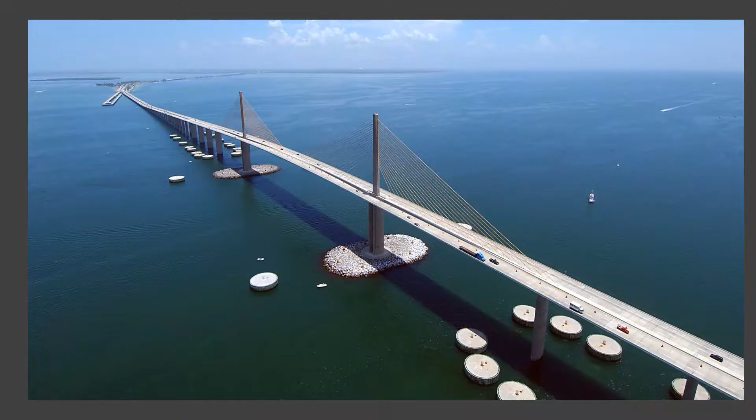Welcome to the District Structures Maintenance Office Learning Lab. Before we start, here's a note from our fearless leader, District Structures Maintenance Engineer, Jim Jacobson.

Good morning. My name is Jim Jacobson and I want to welcome you to our District Structures Maintenance Office Learning Lab. You might have heard our names as the Bridge Office, District Bridge, or Structures Maintenance. We answer to all of those names. I joined the department in 1999, and in 2010 I have the honor of serving as the District Structures Maintenance Engineer. We have 14 people in our office covering 17 counties and 2 districts.

The reason our office was formed was back in the 1960s, the nation and Florida did not have a standardized bridge inspection program. Well, this led to, in 1967, the Silver Bridge over the Ohio River collapse, killing 46 people. The next year, in 1968, closer to home, just up here in Pinellas County, the US 19 bridge over the Anclote River collapsed, killing 1 person and injuring 5. So that really got Florida and the nation geared up for a standardized bridge inspection program. So by the early 1970s, this office was formed out of D1, and ultimately when it split, it serves now both districts, D1 and D7.

As you may have guessed, our core mission is to inspect, maintain, and operate the state's bridges. We also inspect locally owned bridges and give the reports to the locals through a federally funded program. Anything over 20 feet is a bridge, and we also do a lot of other ancillary structures, as you'll learn from our members here. So I really am proud to share our team here who will showcase what they do. It's a group of talented people dedicated to this core mission, and I want to thank you for participating today.

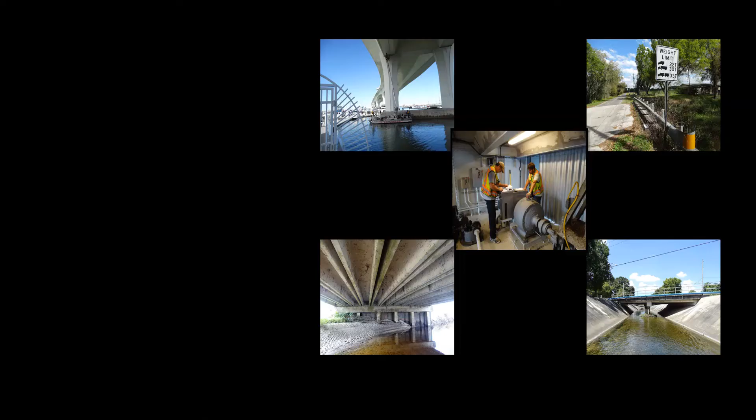The Bridge Office has many responsibilities, which include, but are not limited to, bridge management, bridge repair and rehabilitation, load ratings, and emergency response. Next, let me introduce the DSMO admin staff, Linda Green and Patricia Armbrust.

Hello, my name is Patricia Armbrust. I am the Administrative Secretary for the District Structures Maintenance Office. My function here is to assist with the administrative duties, such as processing the monthly invoices and the motor logs and conducting safety inspections. I also am responsible for the MMS data input and the EDMS structures files. And once a year, I get to go on a scavenger hunt for the property inventory. And I'm also here to assist you. So if you're not sure what you need, I might be able to help you with that.

Hello, good morning. My name is Linda Green. I am the Administrative Assistant for the District Structures Maintenance Office, more commonly known as Bridge. My function here at Bridge is to support our cost center manager, Mr. Jim Jacobson, and the supervisors. I have several duties and responsibilities. I am responsible for our operating budget, tracking, preparing spending plans to maximize funds, processing purchase requests, and all purchases for the cost center. I also prepare travel, surplus items, manage requisitions, hire packages, and I am a safety coordinator, just to name a few. We are your District Structures Maintenance Office.

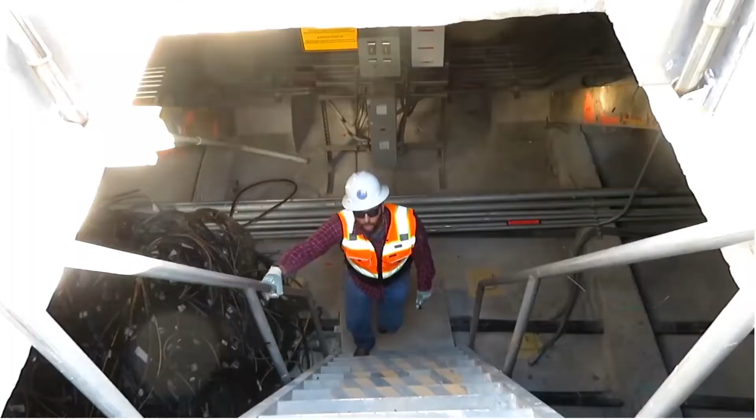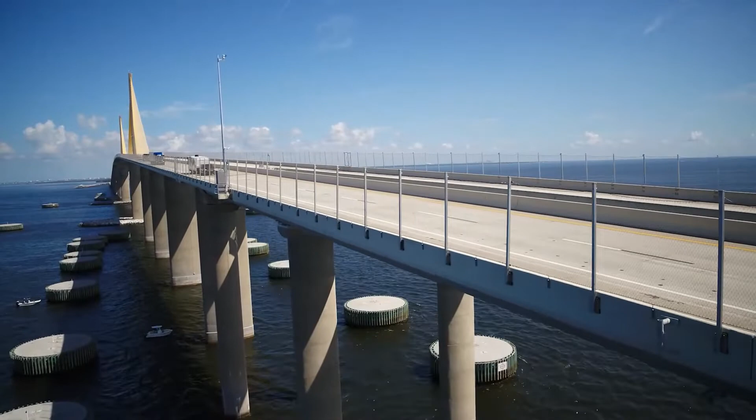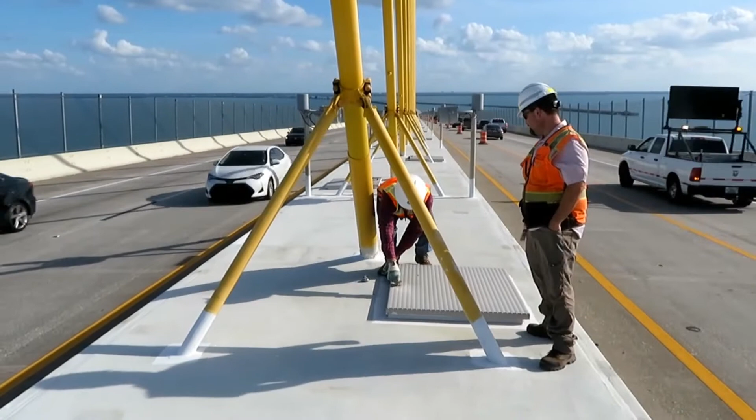Hi, I'm Dan Budens. I work at the District Structures Maintenance Office. I'm a Senior Bridge Engineer Level 2. My responsibility here is to preserve Florida's flagship bridge, the Bob Graham Sunshine Skyway Bridge. It was constructed in the 80s and opened to traffic on April 30th, 1987, at a cost of $244 million to construct. The bridge is nearing its 35-year anniversary. It's my job to ensure that the bridge can continue to provide service life for many years to come. In fact, our target is to get over 100 years of service life out of the bridge.

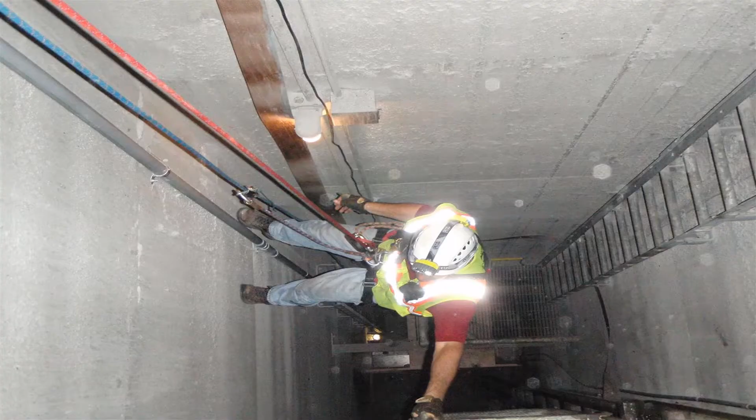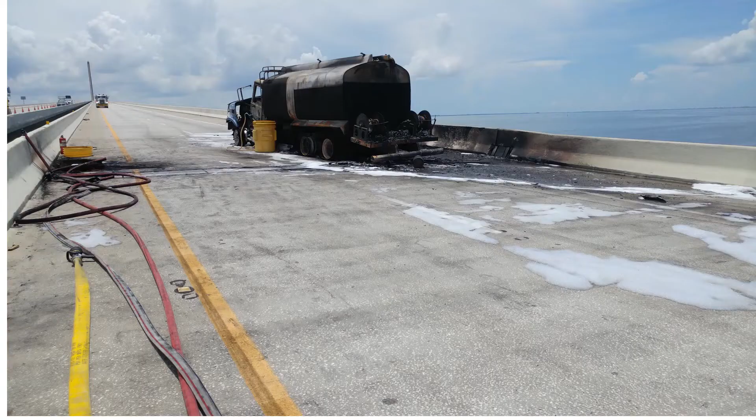To accomplish that goal, we need to proactively maintain the bridge. To do so, we carry out several in-depth routine bridge inspections with extremely detailed bridge inspection reports. We have a full-time asset maintenance contractor working for the department to keep on top of routine and unexpected maintenance needs. Additionally, we generate work orders and repair work items for our asset maintenance contractor to complete based on the inspection reports.

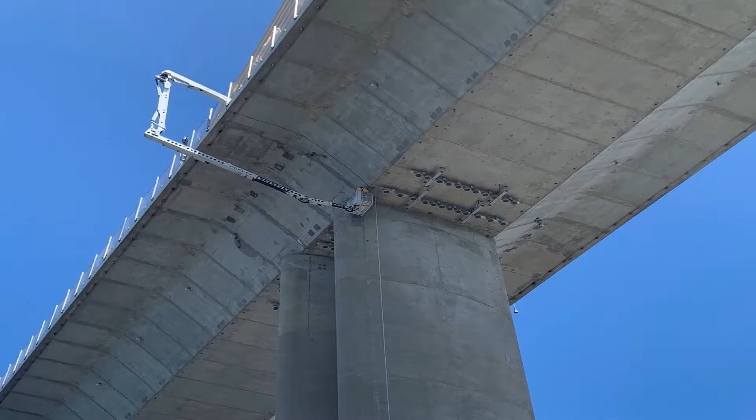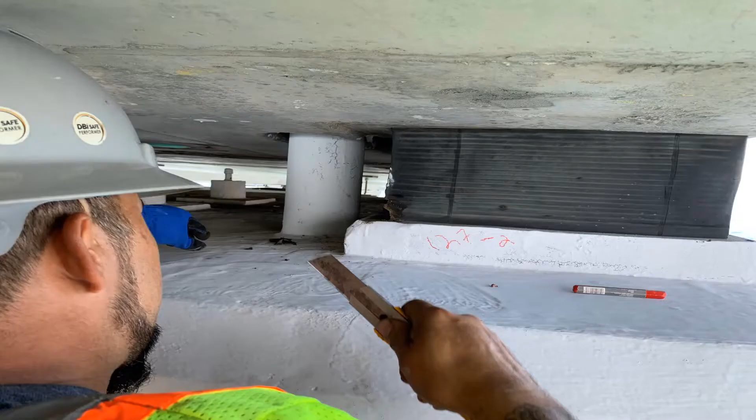For these repair items, based on the severity of the repair need, different priority levels, 1, 2, or 3, are established, and those come with different time frames for completion of the work. For example, a high priority work item would be classified a level 1 priority. It would come with a 60-day timer for the work to be completed. A lower level priority work order would be considered a level 3, and it has 360 days for the contractor

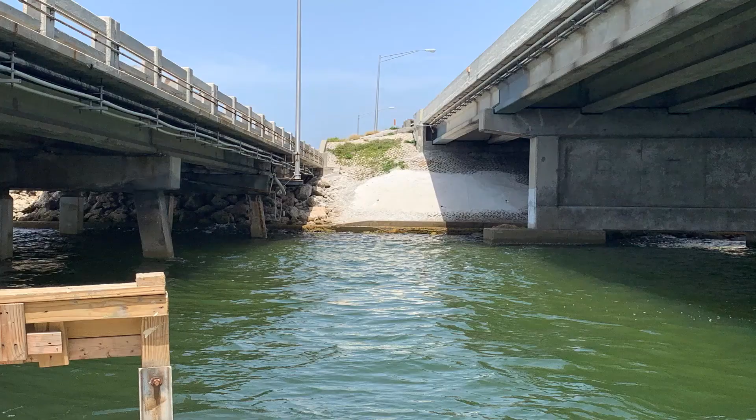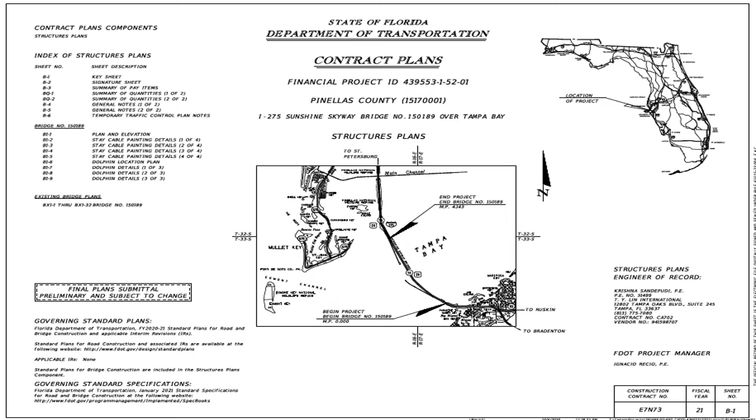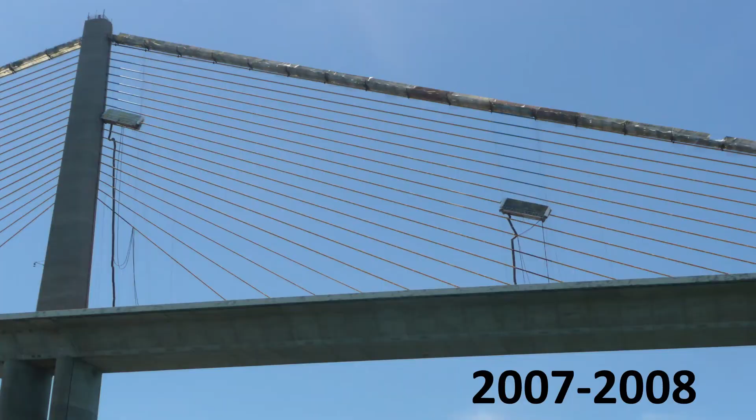to complete the work. In addition to the generation of work orders from the inspection reports, larger scale work needs are established. Our office will pursue these larger repairs in the form of advertised projects through our 5-year work program. One example of these large-scale projects would be the repainting of the sunshine yellow cable stays. They were last painted in 2008. Currently, there's an active construction job going on the Skyway Bridge right now to repaint those cables yellow with a

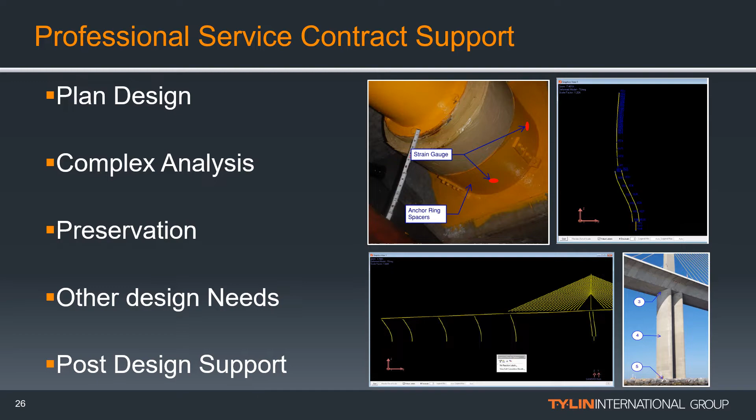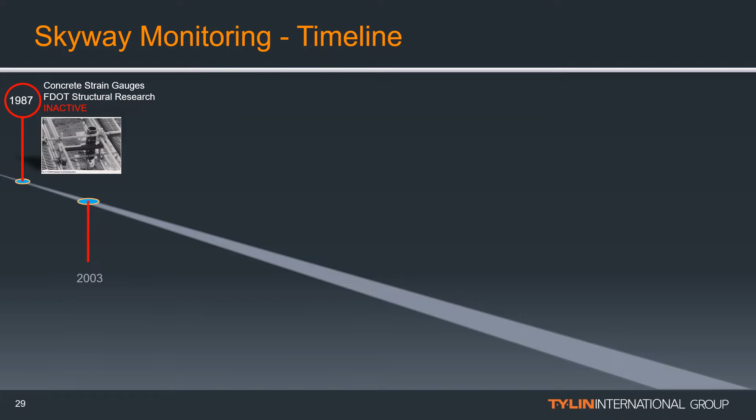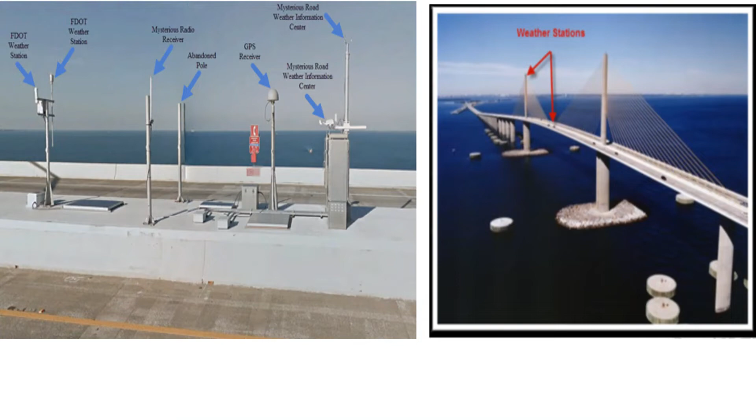new fluoropolymer coating system. I also manage a professional services structure and design contract to aid in the design of these larger scale projects and to work through complex bridge analysis and preservation needs. One of my additional duties is to expand on a structural health monitoring system that was initially deployed on the bridge during construction and has been evolving and advancing ever since. With this system, we monitor the bridge's movement, elevation, and response to extreme weather events.

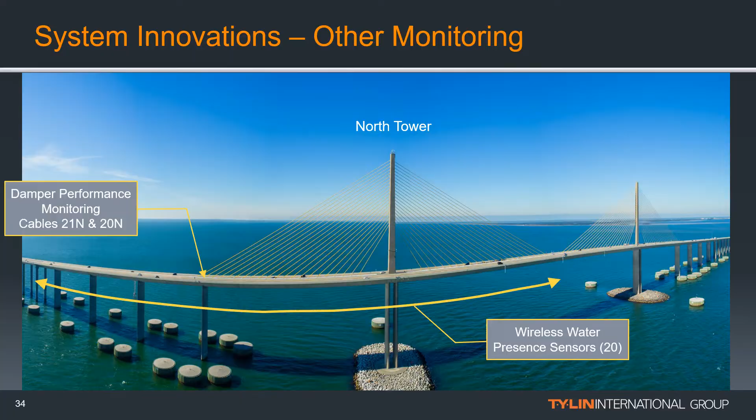As part of the department's Vital Few initiative, we will be enhancing the monitoring system with new innovative devices and monitoring techniques. There is also an aesthetic underbridge lighting system that I program and manage. The department will also display different light shows in observation of special events or to show support for some universal good causes, such as National Safety Week or Red Ribbon Awareness Week.

I also host the infamous Skyway Bridge Tours, the Skyway Bridge preservation meetings twice a year, where we gather with many different disciplines, including our asset maintenance contractor, a variety of structural engineers, academia, and other subject matter experts, even including those from our Central Office Structures Division.

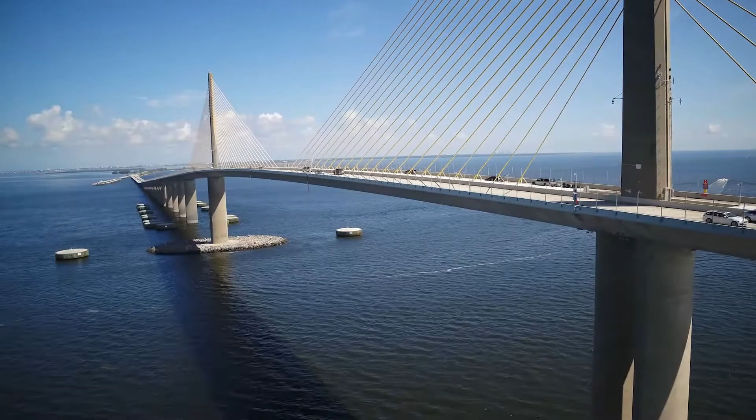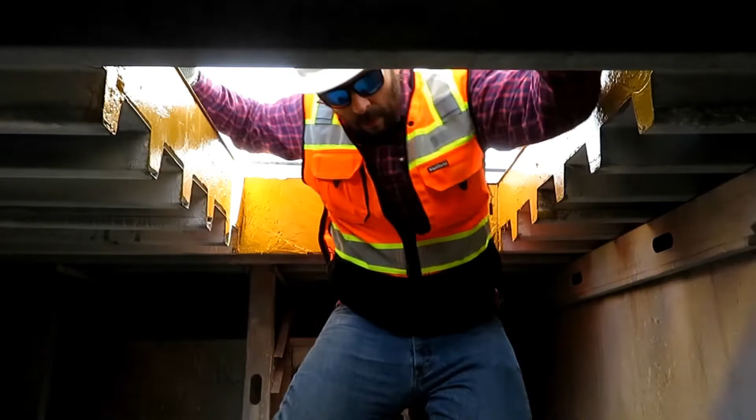We have to inspect all elements of the bridge. We're down here under the median barrier wall, looking at the shocks and damper seals. It's dry down here. That's a good sign.

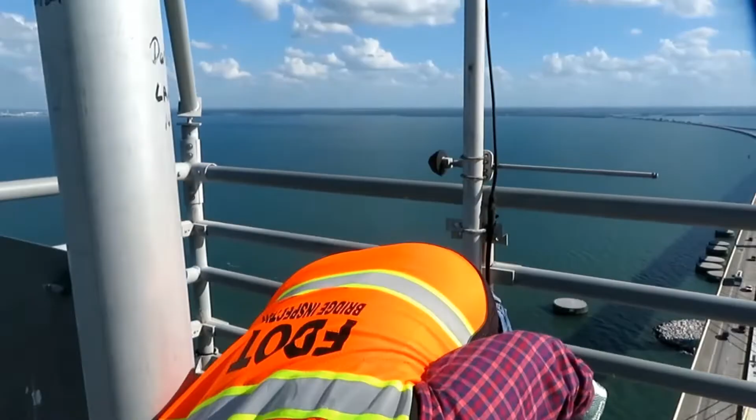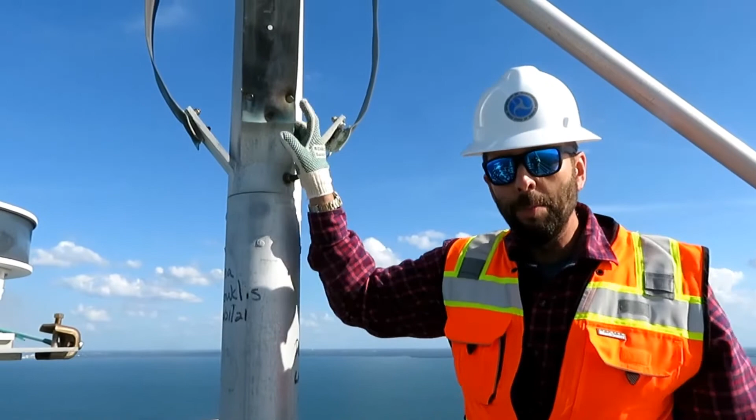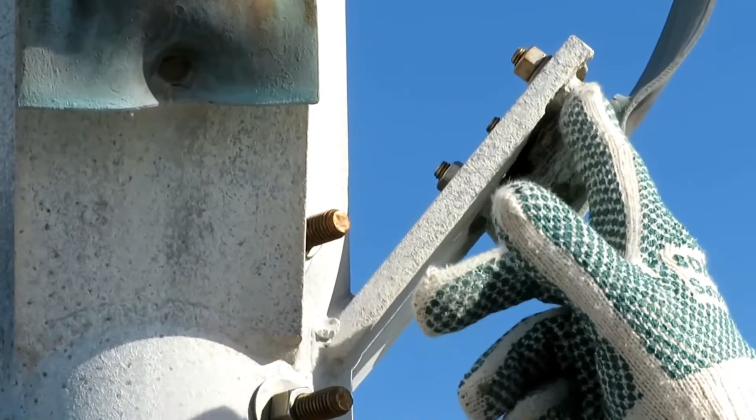We inspect everything on the bridge from tip to toe. Right now we're looking at the lightning protection system. And you can tell that the bridge has been hit by lightning several times, the way that this ribbon has sheared away from its anchor points. This is definitely going to be a work order for our asset maintenance contractor to replace.

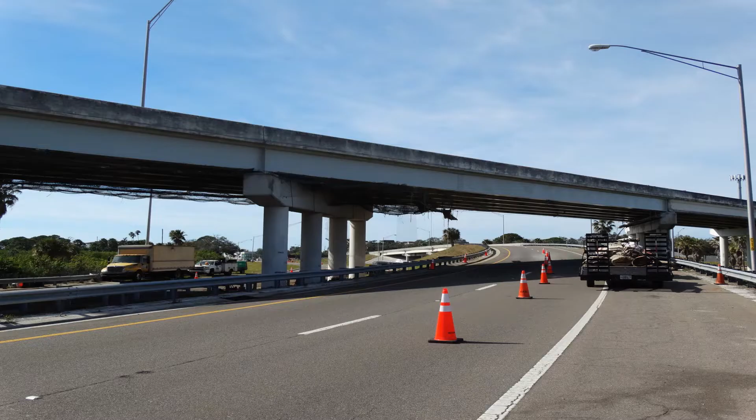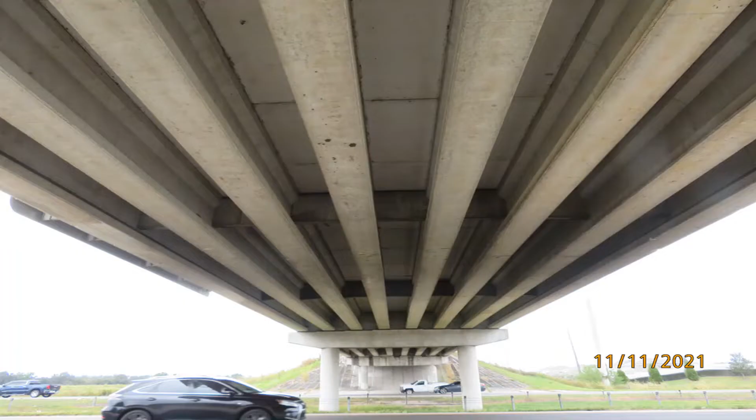As a construction liaison, I attend project pre-cons and progress meetings, visit project sites, help address construction issues in coordination with the project administrator and the AOR, perform a monthly project report showing the progress of each project, and participate in the final walkthrough. For plan reviews and constructability, I conduct constructability review for all structure rehabilitation projects after the 60% and 100% submittals, reviewing plans and performing field visits, addressing any issue that might be a problem during construction.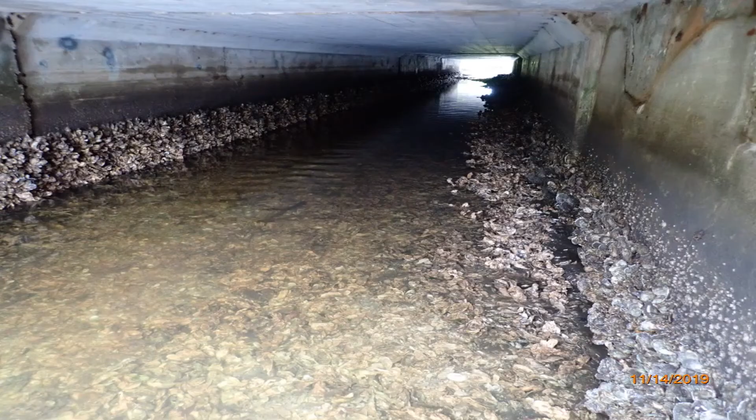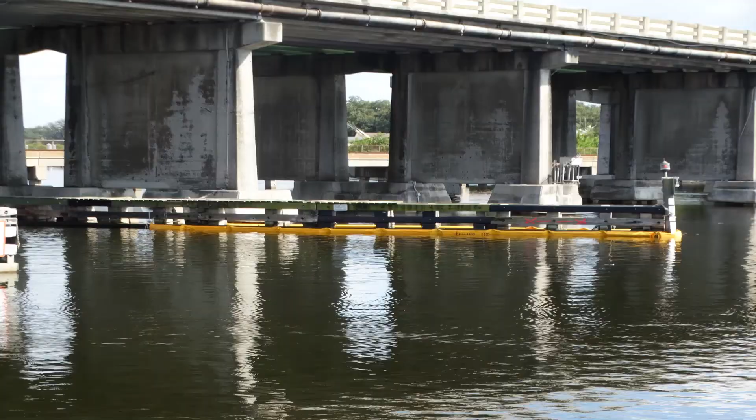Other duties I perform and submit to Bridge: Critical Deficiency Report, Posting and Inspection Report, and FHWA Contract Report, tracking local critical deficiency letters to ensure resolution. Annually, coordinate and update the Skyway Critical Plan of Action. Process all public records requests in regards to structures. That's basically what I do, plus there are odds and ends.

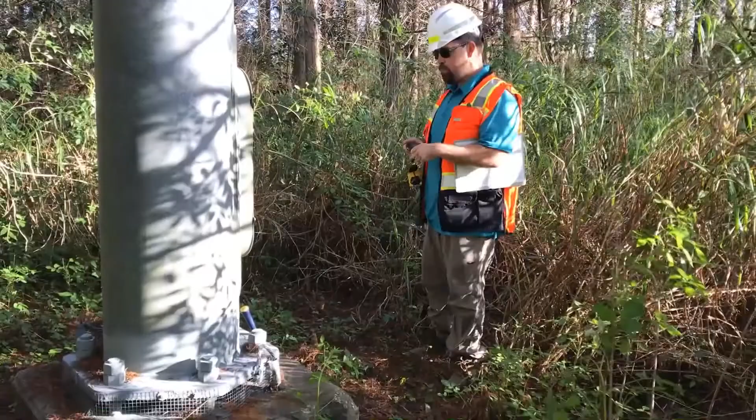I also monitor ancillary structures, which include traffic signal mast arms, high mast light poles, overhead signs, and camera poles, and perform monthly reports that include ancillary tracking, critical deficiency, a project summary liaison report, and I also do plan reviews, ERC comments, on a daily and weekly basis.

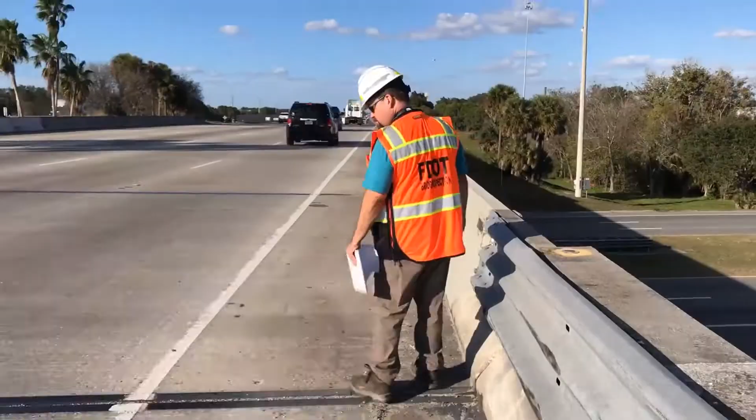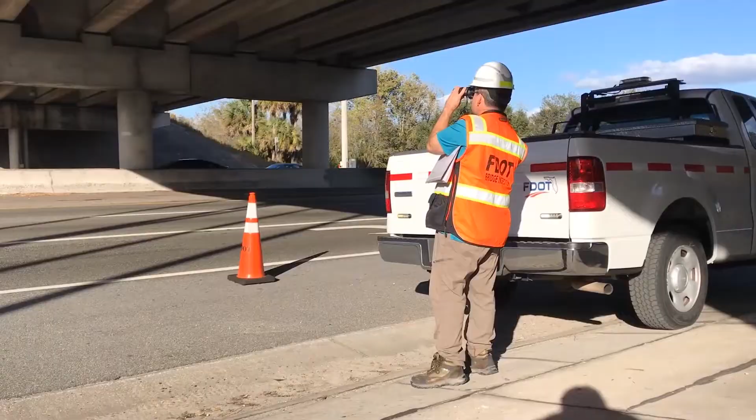Quarterly reports such as posting compliance and inspection compliance reports, FHWA asset maintenance local government inspection report, and semi-annual reports such as the Skyway report. I also process the asset maintenance monthly invoice. I handle public records requests and plan of actions in the spring of each year.

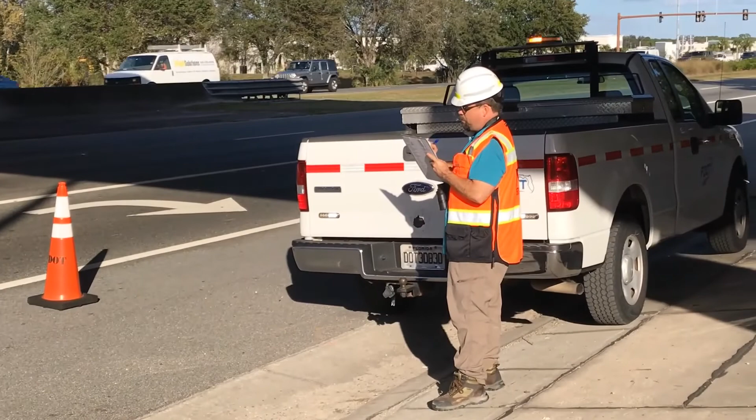And that's pretty much the rundown of my job responsibilities. I also, whenever needed, assist others in the office on projects. Anytime there's help needed, I'm always here to assist.

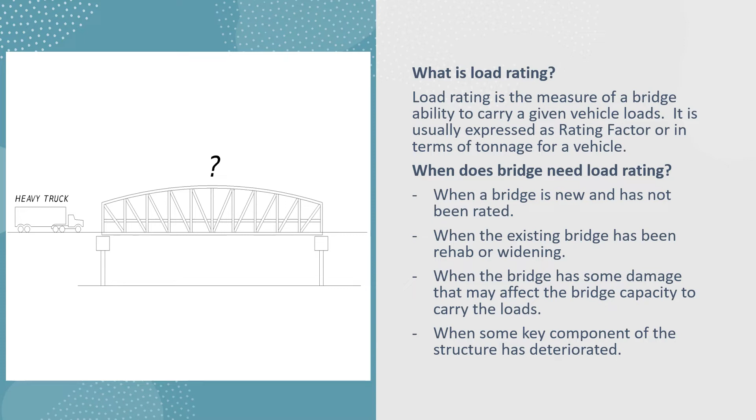So when does a bridge need load rating? When a bridge is new and has not been rated, or when the existing bridge has been rehabbed or widened, or when the bridge has some damage that may affect the bridge's capacity to carry loads, or when some key components of the structure have deteriorated. So I hope you all like the graphic on the left that I have created for this learning lab, because it's hard to explain what load rating is, and I hope you all are still with me so far.

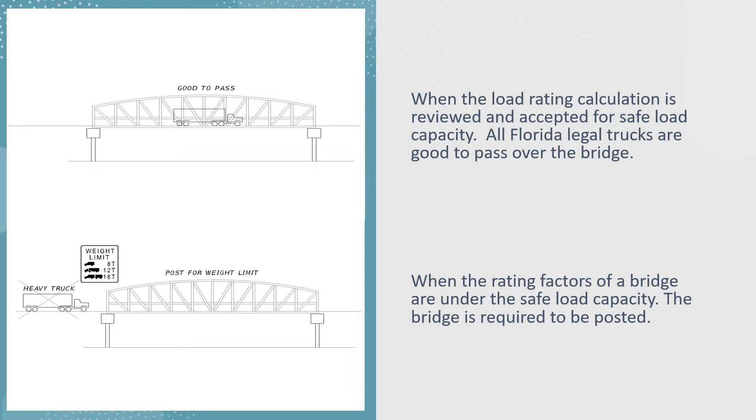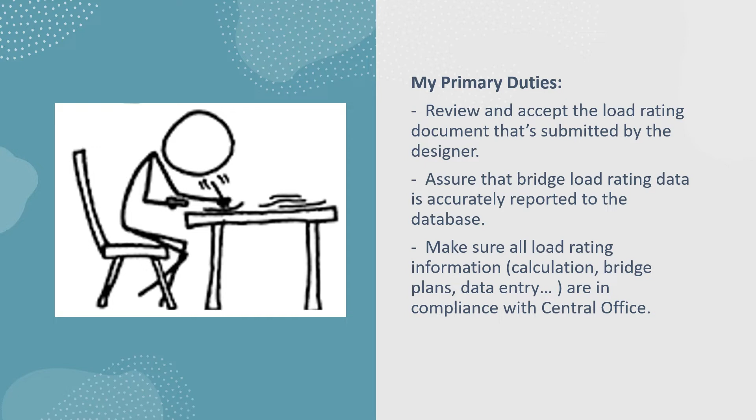So now when the load rating calculation is reviewed and accepted for safe load capacity, all Florida legal trucks are good to pass over the bridge. And when the rating factors for the bridge are under the safe load capacity, the bridge is required to be posted. My primary duties are to review and accept the load rating documents submitted by the designer, ensure that the bridge load rating data is accurately reported to the database, and make sure all the load rating information like calculations, bridge plans, and data entries are in compliance with the central office.

And for support duty in the office, when we have hurricanes or heavy tropical storms, I help monitor the flood level for bridges that may see a lot of rain in the area. I also help the bridge inspection team do inspections. I also perform the ERC, electronic review comments, and miscellaneous office support tasks, like setting up the lighting schedule for the Skyway Bridge, processing unpaid bills, and some other tasks that come my way.

Well, I have been with the department over a year now, and I enjoy my work very much.

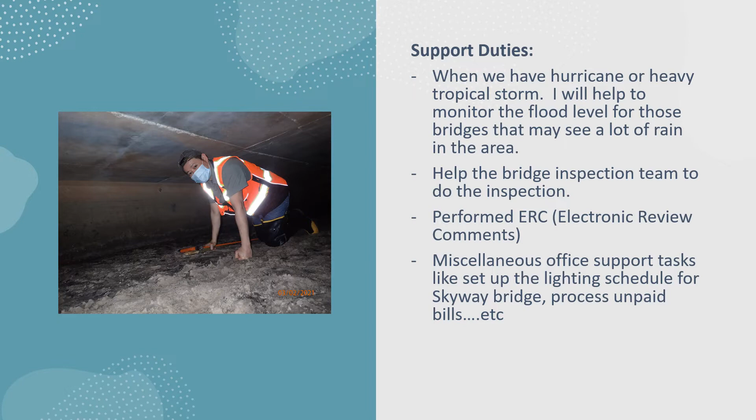Hello, my name is Fernando Carino, and I'm a senior bridge inspector with the District Structures Maintenance Office. Today I'm going to give you a little insight into our bridge inspection program, a little history about how it came to be, and how it relates to my job as a quality assurance inspector. Enjoy. This section of our learning lab will pertain to our bridge inspection quality control, quality assurance program.

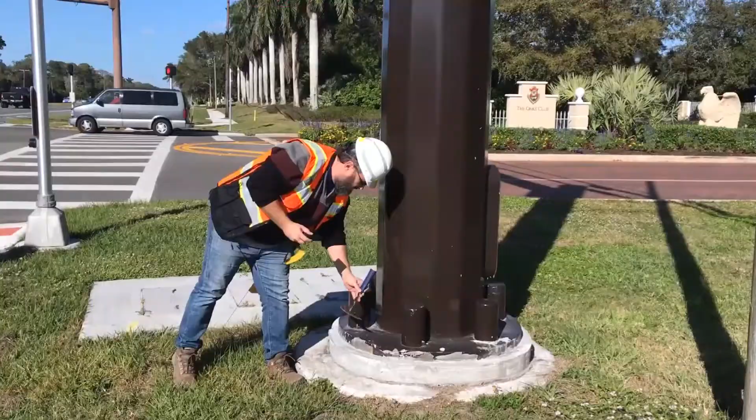First, let me introduce our team of certified bridge inspectors: Paul Elborn, David Nicholas, Ken Ehrlich, and myself, Fernando Carino, combined for over 70 years of bridge inspection experience. Our team performs quality assurance inspections on all state and local structures, including bridges, highway signs, mast arms, and high mast light poles. Quality assurance is the use of sampling and other measures to assure the adequacy of quality control procedures in order to verify or measure the quality level of the entire bridge inspection program. This is accomplished by the reinspection of a sample of bridges by our senior CBI team.

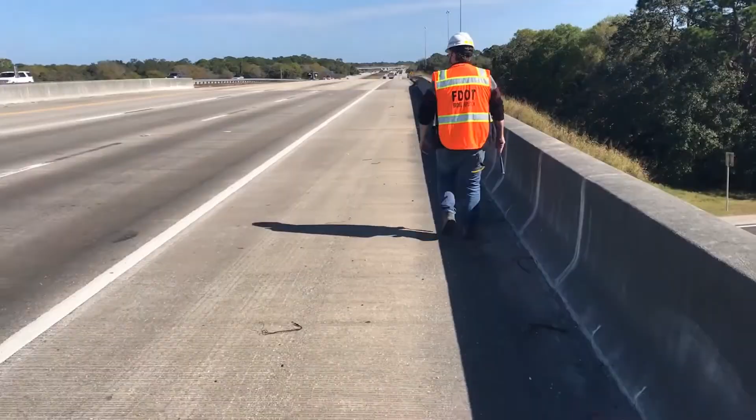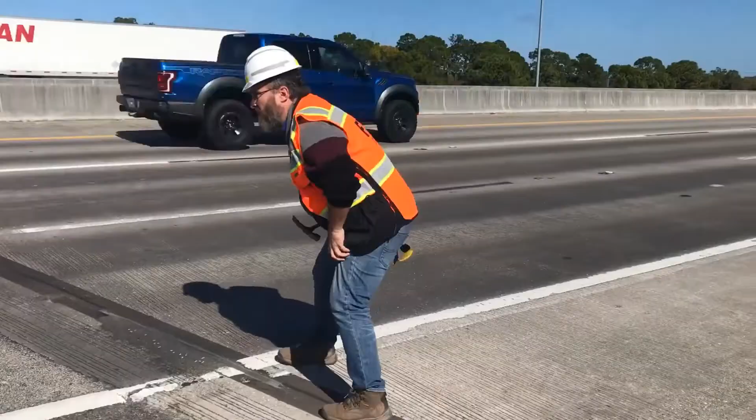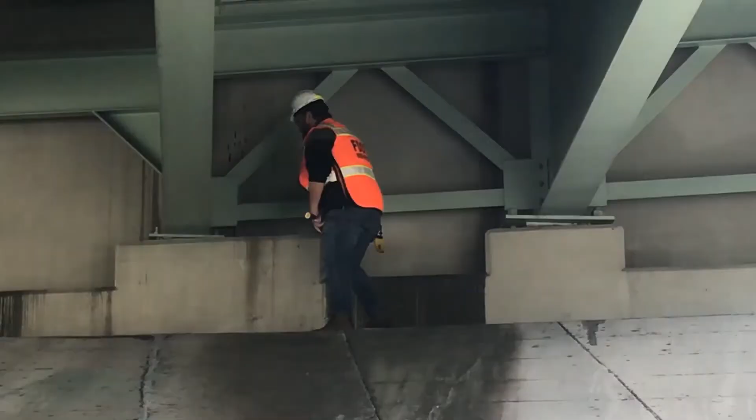We then compare our findings against the previous inspection report to verify the noted conditions of the structures are indeed correct. To ensure a comprehensive inspection and as a part of the requirements of record keeping and documentation, an inspector is responsible for recording the location, type, size, quantity, and severity of deterioration and deficiencies for each element of a given component. The quality of the inspection and reports rest primarily with the inspection team leaders and team members and their knowledge and professionalism in developing a quality product.

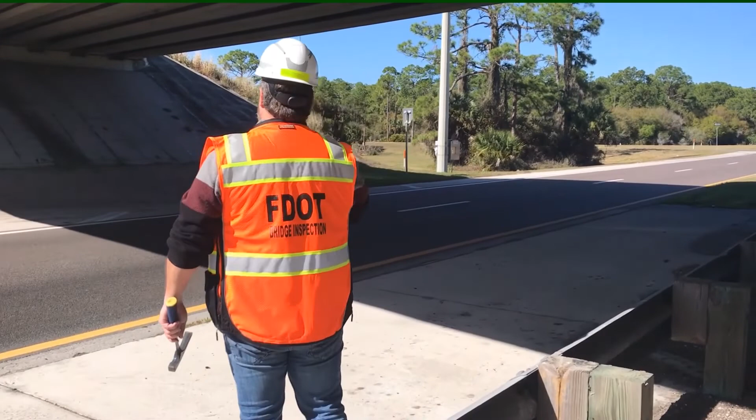A QC/QA program is a means by which periodic and independent inspections, reviews, and evaluations are performed in order to provide feedback concerning the quality and uniformity of the state's inspection program. The feedback is then used to enhance the inspection program through improved inspection processes and procedures, training, and quality of the inspection report. Districts 1 and 7 use systematic quality control and quality assurance procedures to maintain a high degree of accuracy and consistency in their inspection program.

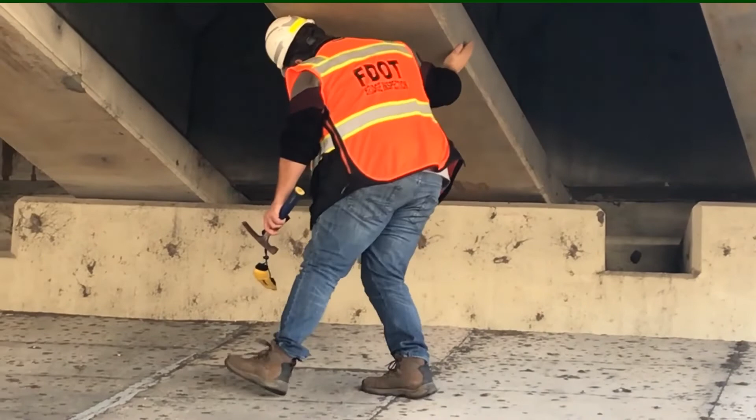Accuracy and consistency of the data is important since the bridge inspection process is the foundation of the entire bridge management operation and bridge management systems. Information obtained during the inspection is used for determining needed maintenance and repairs, for prioritizing rehabilitations and replacements, for allocating resources, and for evaluating and improving design for new bridges. The accuracy and consistency of the inspection documentation is vital because it not only impacts programming and funding appropriation, it also affects public safety.

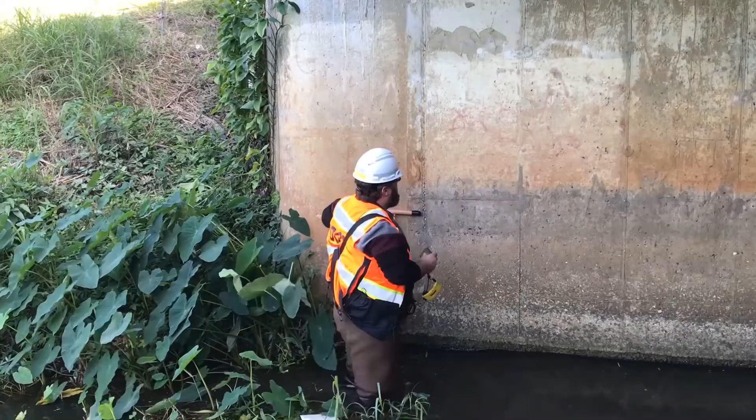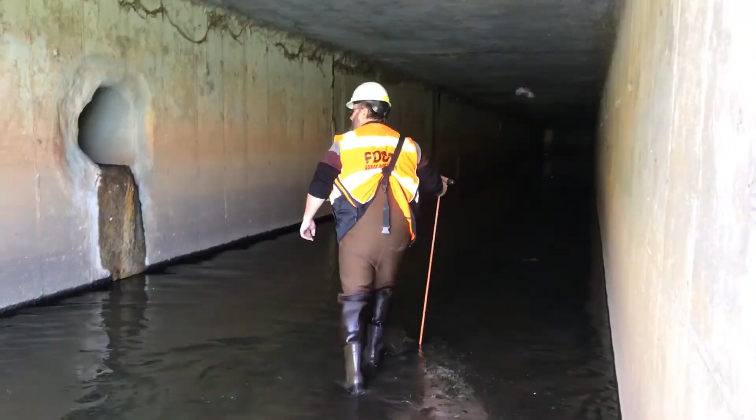Advances in technology and construction have greatly enhanced current bridge design. However, emergence of previously unknown problem areas and escalating costs of replacing older bridges make it imperative that existing bridges be evaluated properly to be kept open and safe. The National Bridge Inspection Standards are federal regulations establishing requirements for inspection procedures, frequency of inspections, qualifications of personnel, inspection reports, and maintenance of bridge inventory.

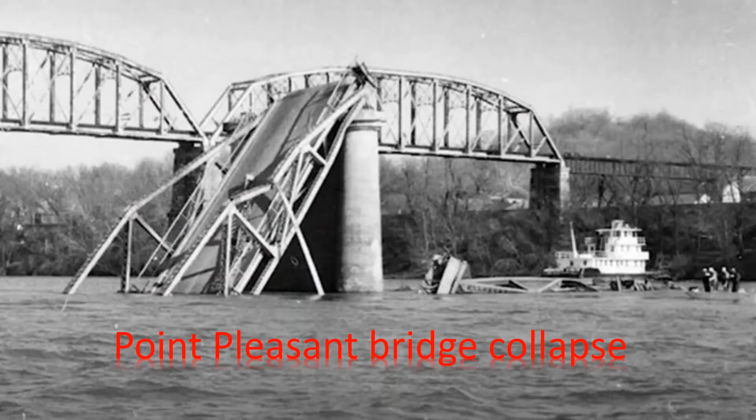During the bridge construction booms of the 1950s and 1960s, little emphasis was placed on safety inspection and maintenance of bridges. This changed when the Silver Bridge at Point Pleasant, West Virginia collapsed into the Ohio River on December 15, 1967. This tragic collapse aroused national interest in the safety, inspection, and maintenance of bridges. This prompted the U.S. Congress to establish a national bridge inspection standard and develop a program to train bridge inspectors.

Much has been learned in the field of bridge inspection, and a national bridge inspection training program is now fully implemented. State and federal inspection efforts are more organized, better managed, and much broader in scope. The technology used to inspect and evaluate bridge members and bridge materials has significantly improved. Areas of emphasis in bridge inspection programs are changing and expanding as new problems become apparent, as newer bridge types become more common, and as these new bridges age enough to have areas of concern. Guidelines for inspection ratings have been refined to increase uniformity and consistency of inspections.

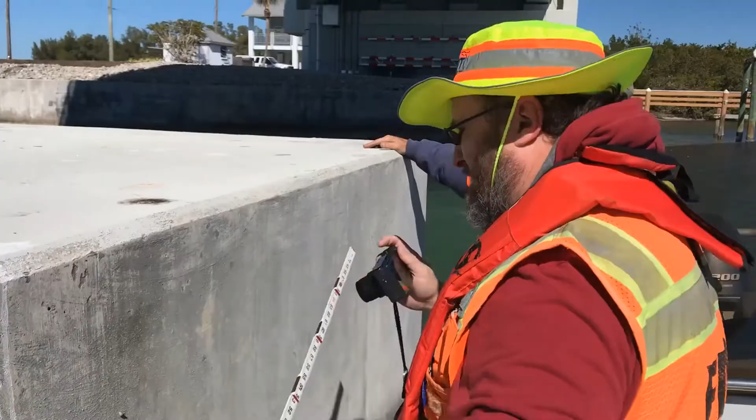Data from bridge inspections has become critical input into a variety of analysis and decisions by the Florida Department of Transportation. Throughout all the expansions and improvements in bridge inspection programs and capabilities, one factor remains constant: the overriding importance of the inspector's ability to effectively inspect bridge components and materials and to make sound evaluations with accurate ratings. The validity of analysis and decisions based on the inspection data is dependent on the quality and reliability of the data collected in the field.

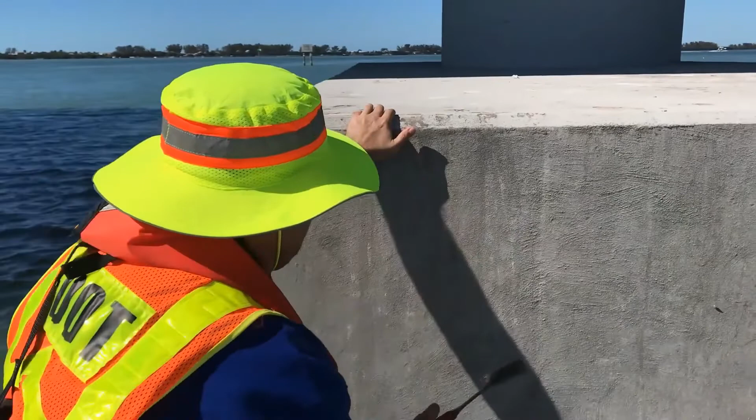The bridge inspector's main role is to provide thorough inspections, identifying bridge components and defects, along with preparing condition reports, documenting deficiencies, and alerting supervisors or engineers of any findings which might impact the safety of the roadway user or the integrity of the structure. Documentation is essential for any type of inspection. Gather enough information to ensure a comprehensive and complete report. Report preparation is a duty which reflects the effort that the inspector puts into performing the inspection. Both documentation and preparation are to be comprehensive. The report is a record of both the bridge condition and the inspector's work.

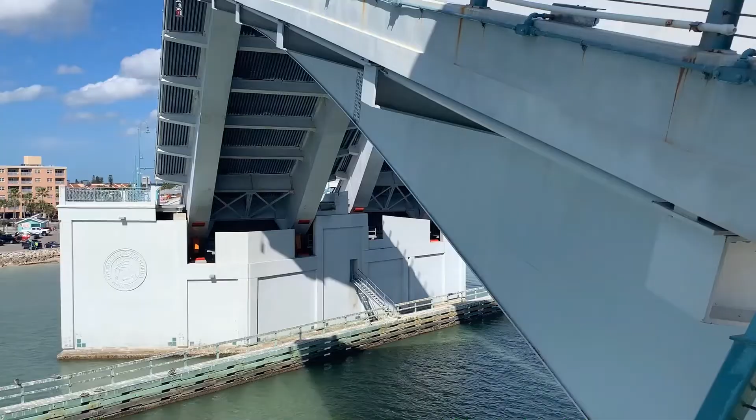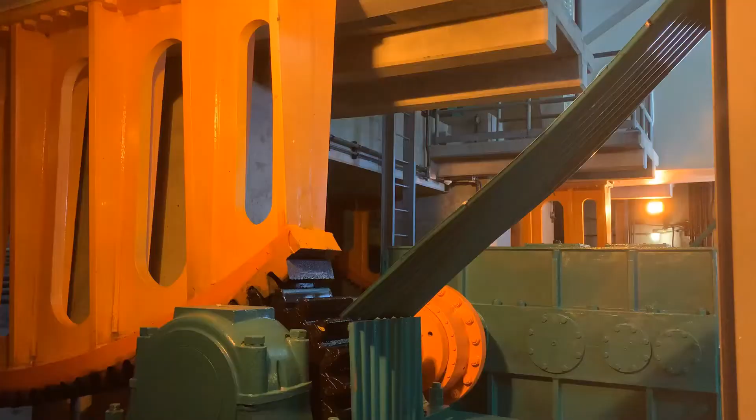Another common duty is to identify work recommendations for bridge preservation and follow up to critical findings. Recommend work items that promote public safety and maximize useful bridge life. In addition to our QA/QC duties, our senior CBI staff is also responsible for maintenance checks of our state drawbridges. We make cursory inspections of our movable bridges every 6 months to make sure all components are maintained in working order.

Our team is also responsible for evaluating a vast majority of the repair work being done to our state structures. We perform field inspection of work orders to assess if the work was completed on time and if the repair procedure is holding up over time. We also aid our bridge rehab team by helping to perform constructability reviews and assess plans to determine if work is warranted or if additional work should be added to the project.

All right, good afternoon. We are here at Johns Pass Drawbridge. My name is Joey Gada. And I'm David Nicholas. And we are about to do a movable bridge QA, and David is going to be the lead while I videotape him, and you're going to hear some good things about our inspection for these types of bridges.

So I'm here in the tender house, and some of the things that we check for, we have all of our maintenance logs, opening logs, and any issues with the bridge, our tenders will write down so we can make sure the bridge is working in order. We also make sure they have all the proper safety equipment. Over here you can see we have some fire extinguishers and first aid kits.

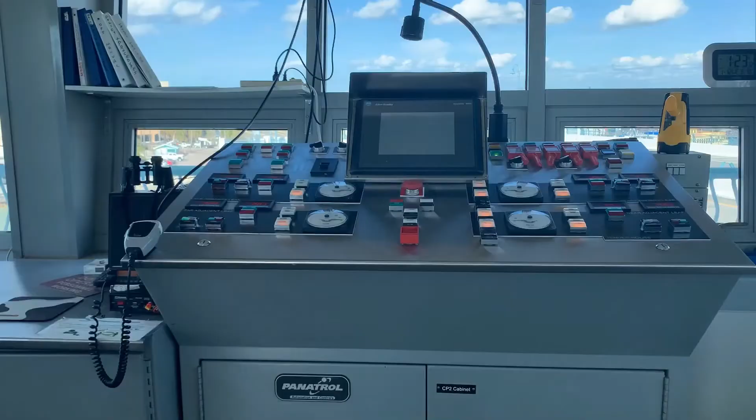Outside on the balcony we have a flotation device and rope that we can throw down in case any help is needed. And underneath here you can see we have flares in case of an emergency. And here's the control console where the bridge tenders operate everything from the traffic signals to the pedestrian gates, the traffic gates, and opening the bridge.

Okay, so we're down here in the machinery room now, and these are the backup generators. You have 2 backup generators here. So if there's ever a power outage, there's an automatic transfer switch that will switch over to emergency power, and the bridge can be operated off of the generators.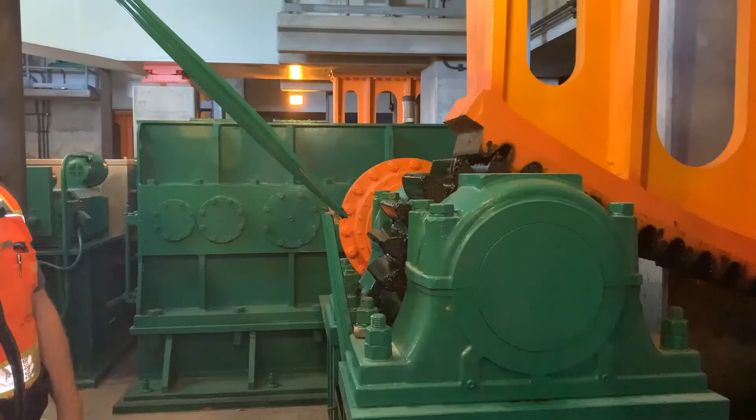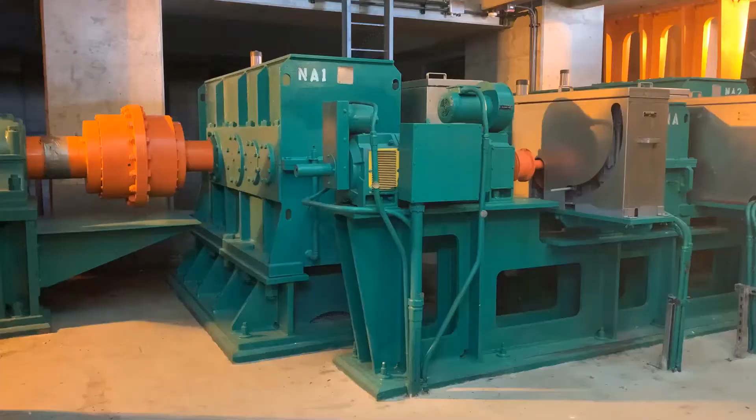So another thing we do when we're here is we check the racks and the pinions and the gears to make sure they're adequately covered with grease. There's not a buildup of dirt, debris, or even bird excrement in there. And this big mass machinery here are your motors, your brakes, and your blowers. This is how the bridge opens.

So right now we are inside the main girder. You can look all the way through the openings down towards that light. That's where the span lock is. That's what locks the 2 bascule spans together.

And that's a wrap. Thanks for joining us at John's Pass for a movable QA.

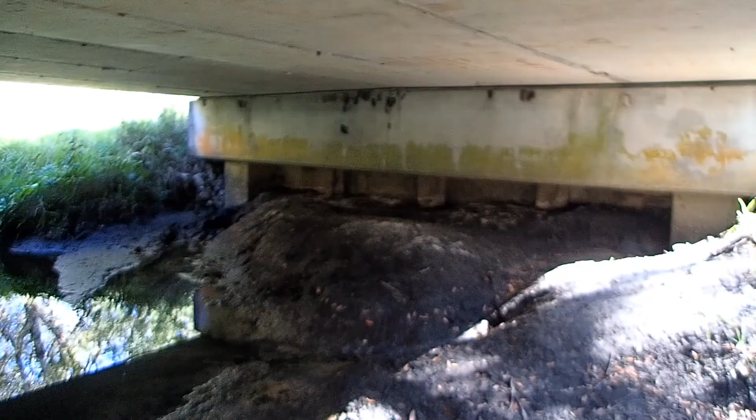Hello, I'm Paul Elborn, Senior Bridge Inspector for Districts 1 and 7. Today I'm doing a quality assurance review on a bridge that is built with pre-stressed concrete slab units. In this case, these are actually Sonovoid slab units. During this inspection, we're actually looking for any cracking, any spalls, any types of misalignments that can be found along the slab units, and even discoloration that may give us a clue into corrosion issues.

As you can see, the slab units sit on top of the intermediate bent caps and abutment caps. In this case, the abutment also has exposed piling. You can also see an example of scale damage to the piling, an issue that's caused by tannic water.

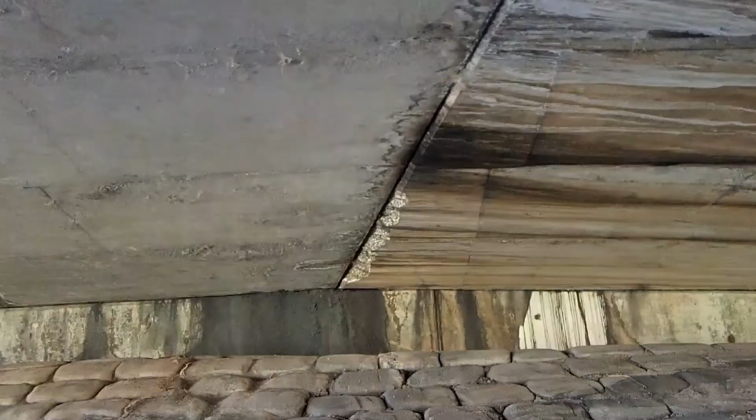Hello, I'm Paul Elborn, Senior Bridge Inspector for Districts 1 and 7. Today I'm doing a quality assurance review on a structure that was inspected 90 days ago. In this case, this is a cast-in-place structure where the structure was designed in 2 pieces to meet in the middle. During the QAR, it was found that the 2 halves of the structure were rubbing together.

There's a lack of space for the movements under live loads and for the expansion and contraction that happens with temperature changes. And we had to get together with our asset management contractor in order to come up with a plan to repair this. Above, the deck area where the 2 bridges transition together, there's spalling and potholes being created from the lack of expansion and contraction.

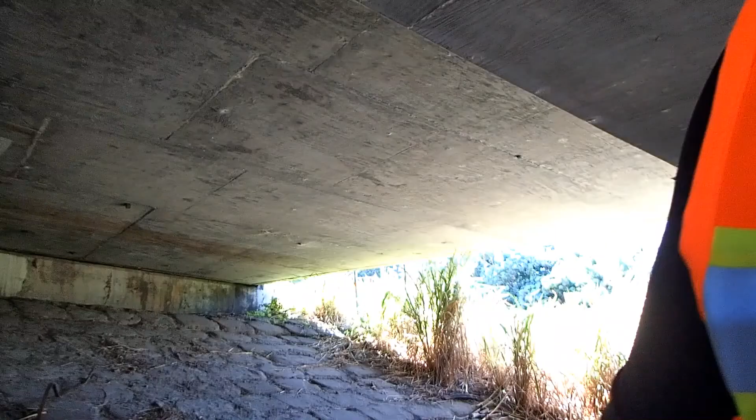Our asset management contractor was able to come up with an effective solution for repairing the deck top. There's now epoxy patching in place that will allow safety for the traveling public.

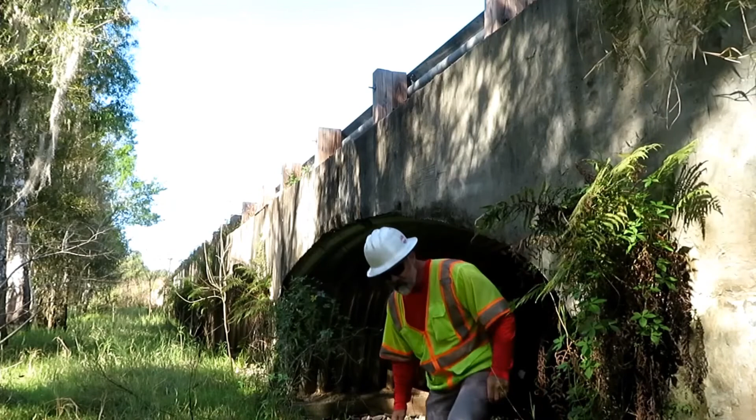Hi, my name is Ken Ulrich. I'm a certified bridge inspector. I work for T.Y. Lin International, GEC at FDOT, Districts 1 and 7. We're out today doing an inspection, what we call a go-behind inspection. We bring out the inspection report that was delivered, and we go behind and check to make sure they're doing what they should be doing.

And we do all types of structures, from the Skyway, interstate bridges, even signs, high mast light poles, traffic signal mast arms, and small bridges like this, culverts, corrugated steel. So we're going to be out doing this inspection today.

This concludes our DSMO Learning Lab. Hopefully we were able to give you a little insight into the many responsibilities that our small bridge office handles on a daily basis. We hope you enjoyed our presentation. Thank you.